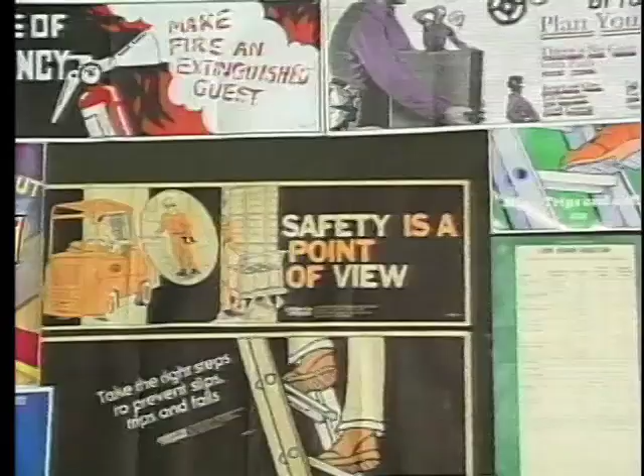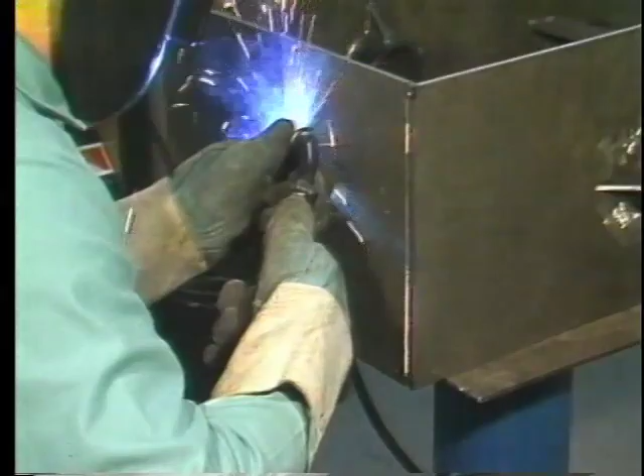Workers face daily exposure to potential hazards. Correct precautionary measures can prevent accidents and make welding as safe as any other metalworking occupation. Metalworking hazards include exposure to hot metal, sharp edges, and working around moving machinery. For welding, there are additional hazards such as electric shock, arc radiation, air contamination, flying objects, fire and explosions.

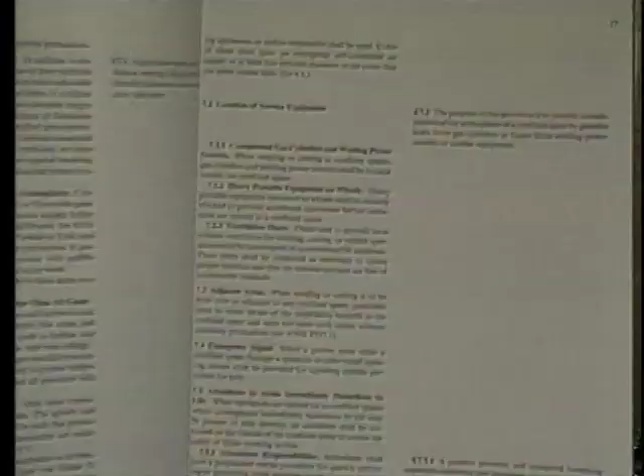To ensure safety for workers, there are laws which prescribe regulations and warnings. The Occupational Safety and Health Act makes many national standards enforceable by law. The most important is the American National Standards Institute Z49.1, Safety in Welding and Cutting. This standard states that welding and cutting operations pose potential hazards from fumes and gases, electric shock, heat radiation, and even excessive noise.

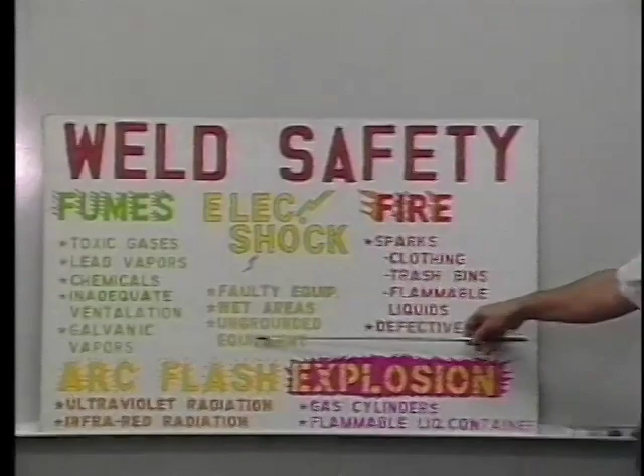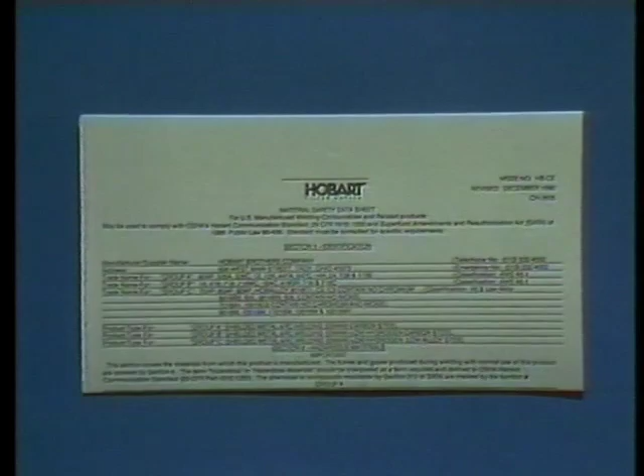Employers are required to establish comprehensive hazard communication programs to inform workers about dangers in the workplace. By the same token, the employee is obligated to learn and use safe practices, obey safety rules, and take proper care of equipment. The use of material safety data sheets, or MSDSs, is mandatory. These cover the potential hazards of every substance taken into the workplace.

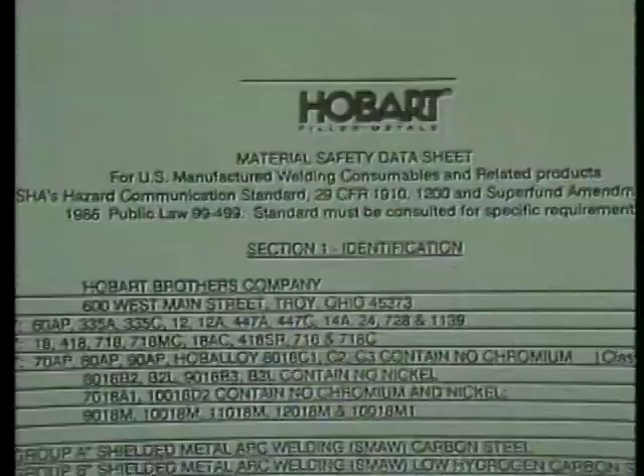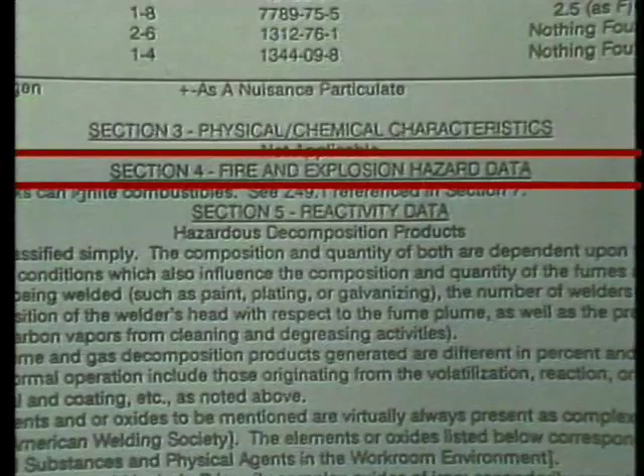Welding electrode suppliers furnish MSDSs, which should be kept on file in the personnel or welding department. Copies should be given to all supervisors, welders, and anyone connected with the welding area, and should be read and understood by all. An MSDS is divided into sections that identify the manufacturer and materials and list any hazardous filler metal ingredients, physical and chemical characteristics, potential fire and explosion hazards, emergency procedures, precautions and control measures, and reactivity data which explains what happens to the filler metal during welding.

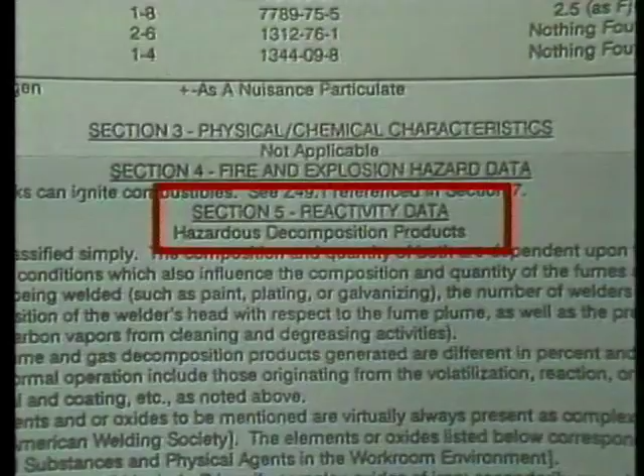The electric arc is a powerful source of visible, ultraviolet, and infrared light, all of which can be harmful unless suitable protection is used. Proper clothing should have no openings or gaps which expose the skin to ultraviolet arc burns. All personal clothing should be flame retardant, dry, and free of oils. Wool clothing is better than cotton because it doesn't disintegrate or catch fire.

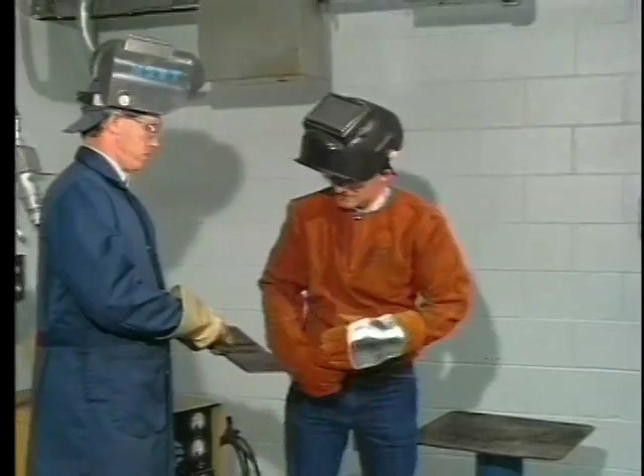For heavy-duty welding over 200 amps, a leather jacket or apron, leather gauntlet gloves, safety glasses, spats, head cap, and a helmet with a proper filter lens must be worn. Pants legs should be without cuffs and cover the shoes. The shoes themselves should be safety types with high ankles. Even with light-duty welding under 200 amps, the skin must not be exposed. Other personnel in the welding area should wear the same type of protective clothing.

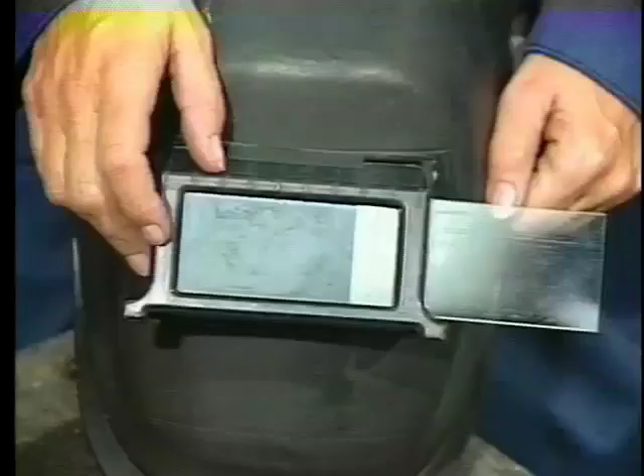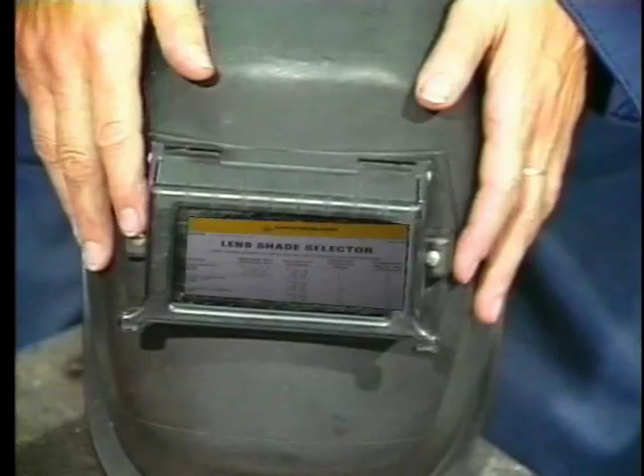Whatever the welding application, safety glasses should be worn at all times. Contact lenses may be worn for welding, but these do not replace safety glasses. Helmets should have the proper filter lens, protected from spatter by a clear cover plate. Lens shades use a numbering system to help select the amount of darkness required for the amount of amperage used. Refer to the American Welding Society's specification for safety in welding and cutting to determine the proper shade needed.

If unprotected eyes are exposed to the arc even briefly, ultraviolet arc burn can result, which causes the sensation of hot sand in the eyes for up to 48 hours after exposure. Up to 6 hours may pass before any symptoms appear. Eye drops or eye washes will give temporary relief. If the pain persists for more than 24 hours, a doctor should be consulted.

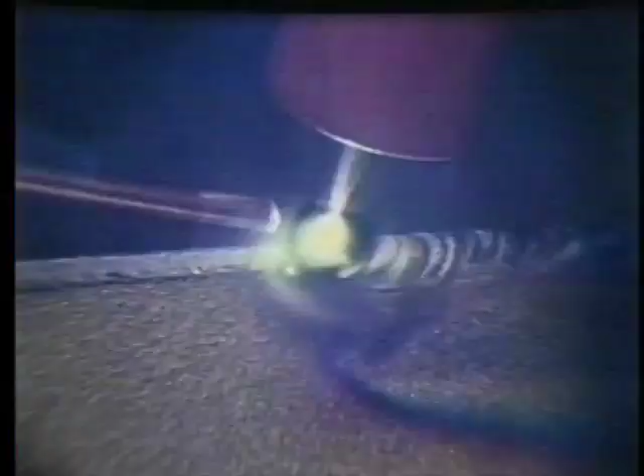Precaution signs should be posted in and around the welding area and should be in agreement with the American Standard specification for accident prevention signs. This includes warnings that anyone with a pacemaker should take special precautions or avoid arc welding areas. Heat from the arc is infrared radiation, which is harmless if the welder is properly protected. But ultraviolet radiation is invisible and much more potent.

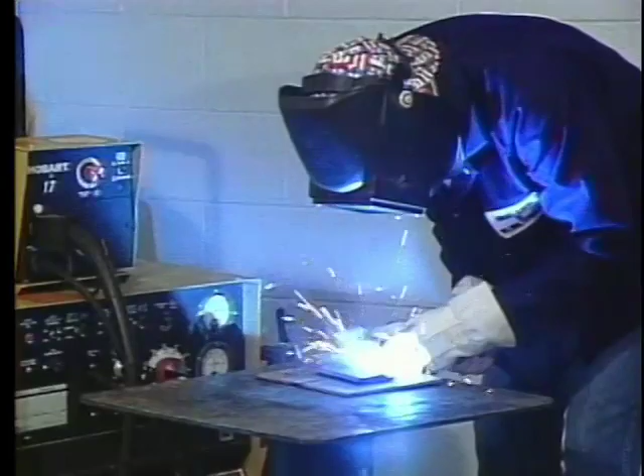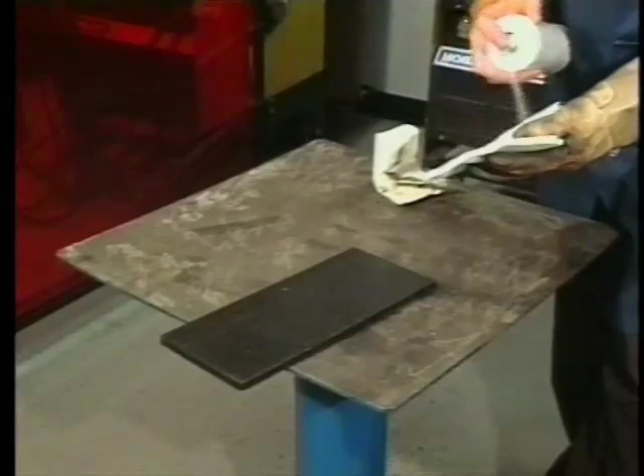Screens should be used around the welding area to shield nearby workers from the radiation and should be free from tears. If welding is done in an enclosed booth, it should be painted with a flat finish that will not reflect ultraviolet light. Metal degreasing or cleaning solvent operations should be kept at least 200 feet away from the welding area, since the ultraviolet radiation can decompose some cleaning chemicals into phosgene gas. This is a harmful substance with the odor of new-mown hay, and if detected, the area should be evacuated and ventilated until the gas has cleared. Because of this hazard, make sure solvents on metal are thoroughly removed before welding begins.

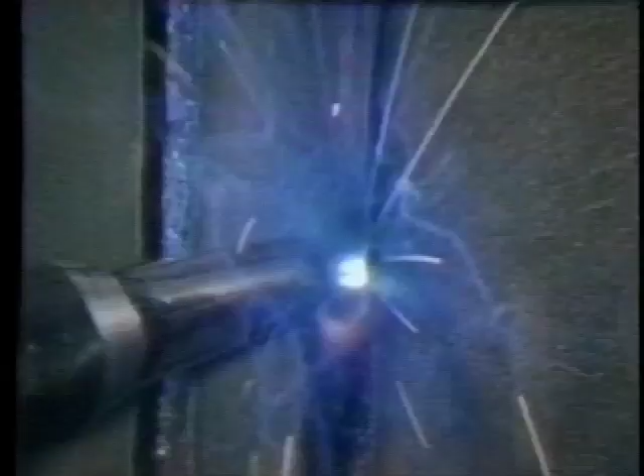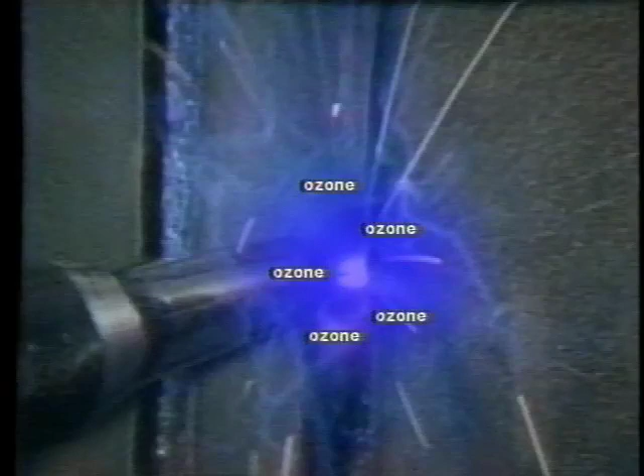Ultraviolet light can also produce ozone, an active and harmful form of oxygen that can cause coughing, wheezing, chest pains, or a burning sensation. Proper ventilation will reduce the ozone concentration around the arc area. It is not a long-range hazard since it changes back into oxygen a short distance from the arc.

Electric shock is associated with all electrical equipment or tools. Tools usually operate on ordinary 115-volt household voltage, but this is higher than the output of a conventional arc welding machine. National standards are set by NEMA, the National Electrical Manufacturers Association, or by the Canadian Standards Association. Use only welding machines that have one of these names on the nameplate.

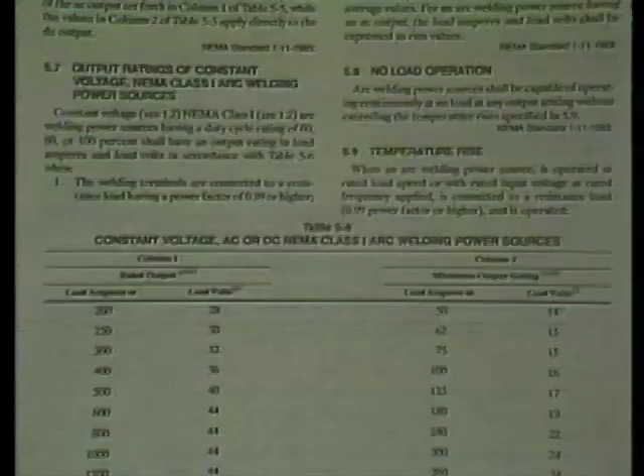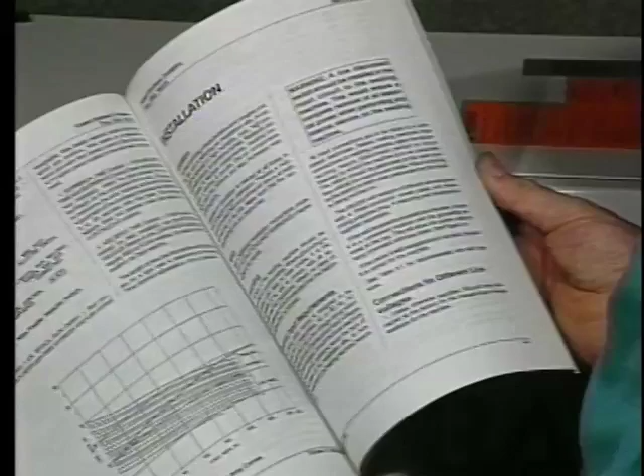NEMA specifications provide classes of weld machines and requirements for duty cycle and maximum no-load voltage. Machines must be installed in accordance with NEMA and local codes. Instructions are given in each manufacturer's manual.

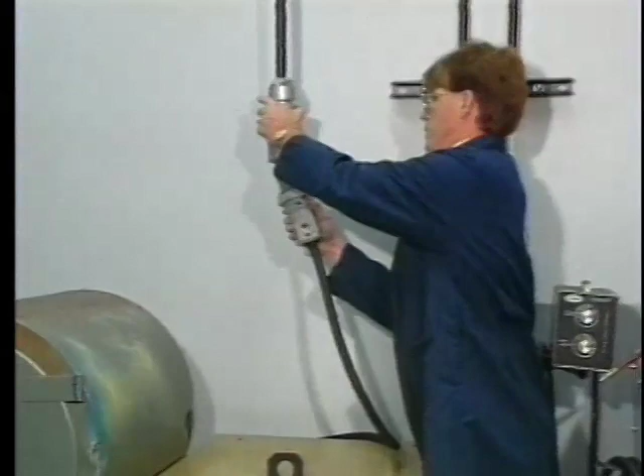If a grounding lead or conductor is part of the power supply cable, be sure it is connected to a properly grounded switch box or building ground. Use a separate grounding lead if it is not part of the supply cable. Note that this does not replace connecting the machine's ground lead to the work surface, which is essential for safe welding operation.

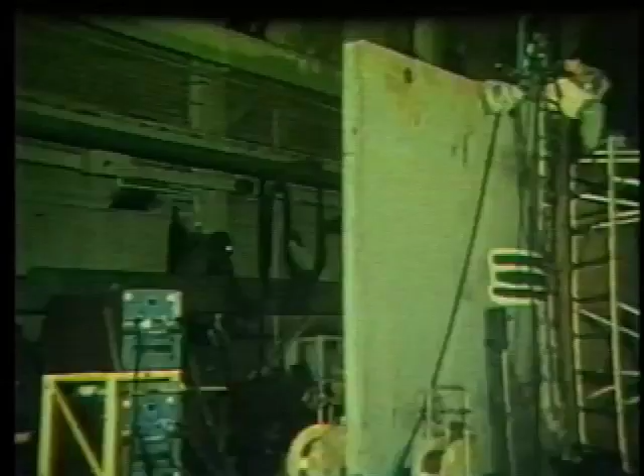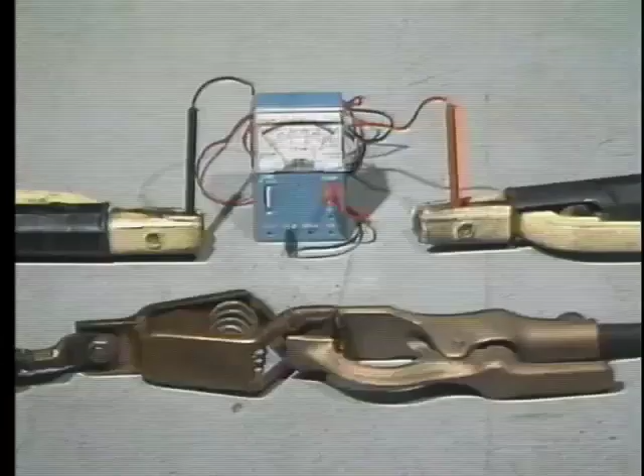When paralleling transformer machines, identify each phase of a three-phase power line. This assures that the machines will be in proper phase with each other. To check this, connect the work leads together, and then measure the voltage between the electrode holders, and it should be practically zero.

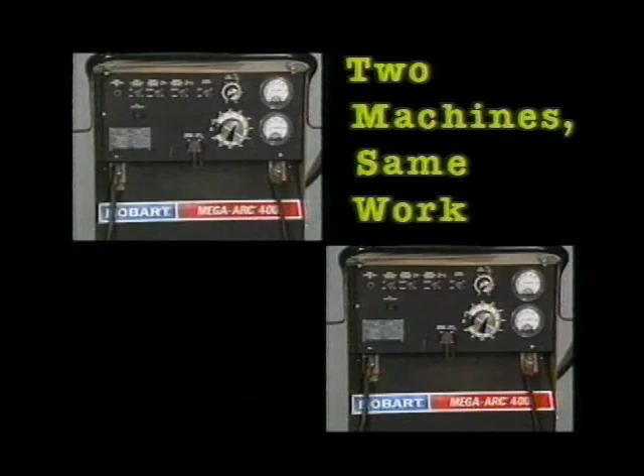If more than one direct current machine is connected to the same weldment, be sure that both are set to the same polarity, both positive or both negative. If they are not, the voltage between the electrode holders will double. Also, do not attach both AC and DC machines to the same weldment.

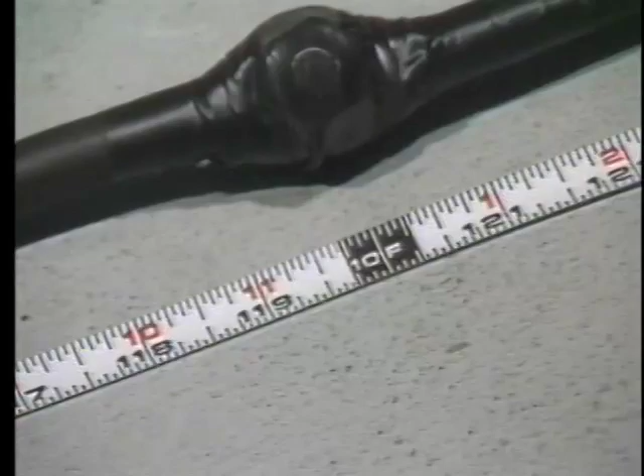Electrode holders should have flexible cables. No splices should be within 10 feet of the electrode holder or gun, and they should be well insulated. Welding machines should be located in a well-ventilated area with nothing obstructing the ventilation ports. Electrode and work leads should not be wrapped around the machine or the welder.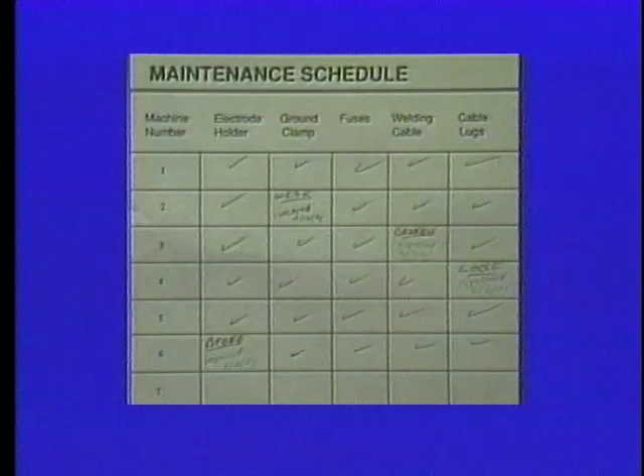Work areas must be kept dry. Dampness increases the chance of electrical shocks. A regular inspection and maintenance schedule should be maintained and records kept. No matter how small the problem, no one but properly trained maintenance personnel should attempt repairs on welding machines, cables, guns, work clamps, and electrode holders. All power sources should have disconnect switches for maintenance purposes. Notify your supervisor of any problems or potential hazards.

Air contamination is the smoke and fumes rising above the welding operation. These contain two types of contamination: particulate matter and gases. Adequate ventilation will reduce smoke hazards. Potential harm from fumes and gases depends on the chemical composition of particulate matter, the concentration at the welder's breathing zone, and the duration of exposure.

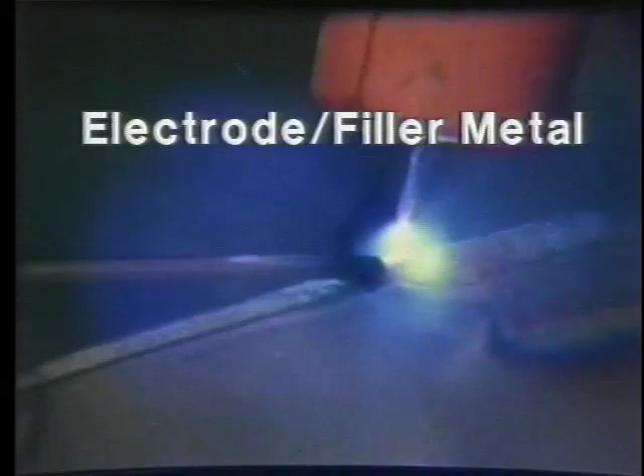Particulate matter is small, often invisible solids suspended in the air, such as tobacco smoke, household dust, and pollen. When welding, the kinds of particulate matter relate to the type of electrode or filler metal, the welding process itself, the current employed at the weld location, atmospheric conditions when welding outdoors, and the composition of base metals and coatings.

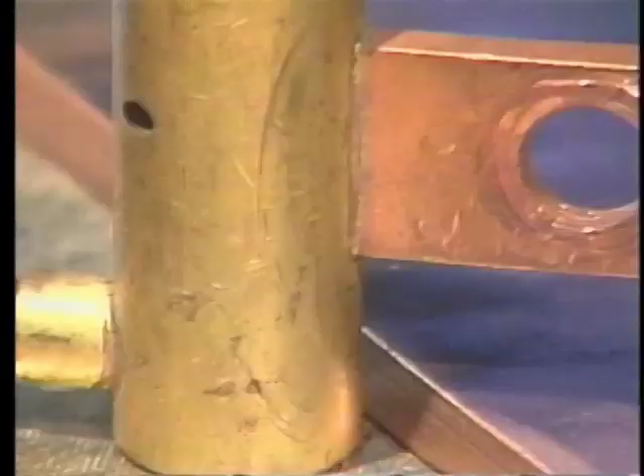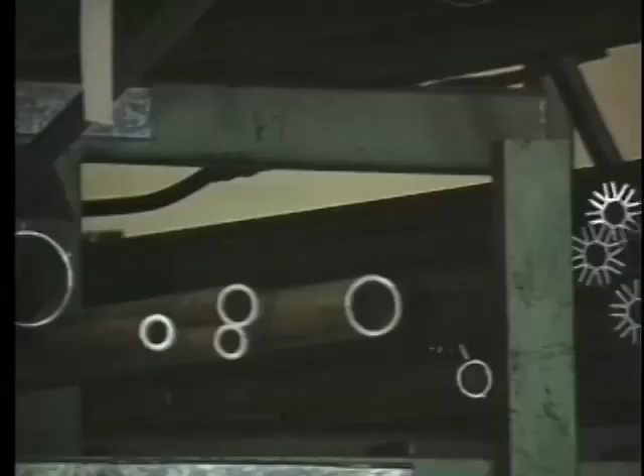Certain metals create hazardous airborne contaminants, such as brass, bronze, zinc, and others. Coatings on the metal, such as paint, oil, grease, or plastic, can also release contaminants. Welding on old painted steelwork can produce smoke containing particles of lead. Newer pipe is sometimes coated with a plastic protective material which can be harmful. Proper ventilation and parent metal cleaning and preparation will protect the welder from all such fumes.

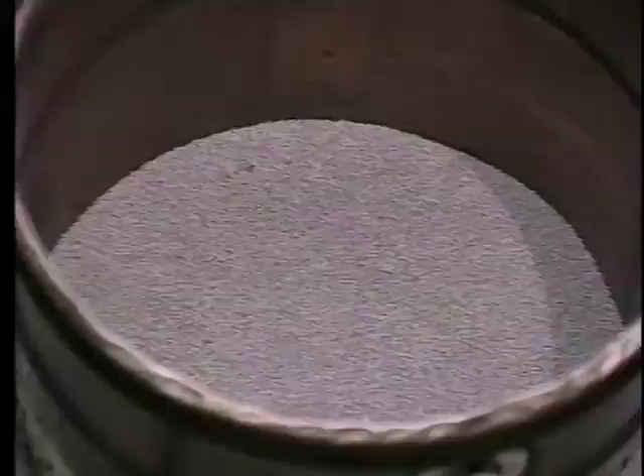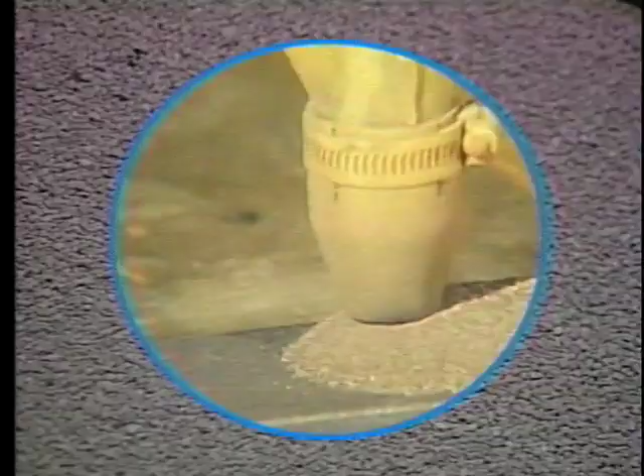An additional source of gases is flux, which is found in the coatings on shielded metal arc electrodes and inside the electrode wires used for flux cored arc welding. The flux used for submerged arc welding can also give off gases when heated. The most common gas produced by electrodes and filler wires is carbon dioxide. Carbon monoxide can also form. These gases should be removed from the welding area.

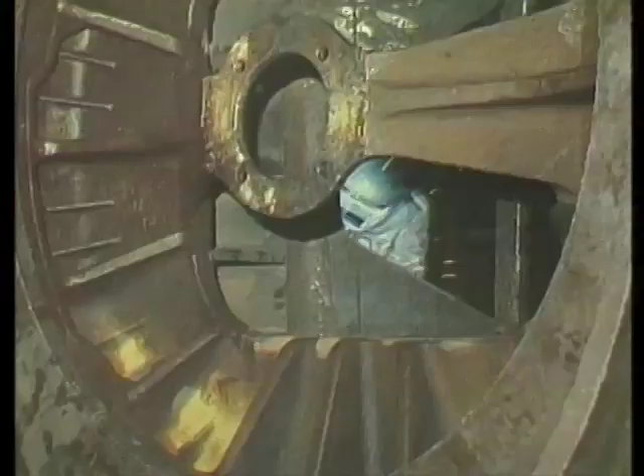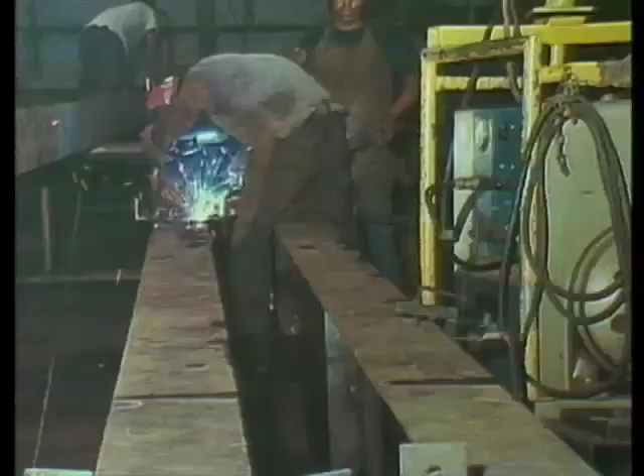Confined areas such as small and restricted spaces, tanks, pressure vessels, tunnels, or small rooms with poor ventilation can become death traps. The hazards here are poisonous, flammable, or explosive gases, oxygen depletion, or heavy concentrations of smoke and particulate matter. Exhausts from engine-driven machines are a prime source of carbon monoxide and carbon dioxide, even in less confined areas, and should always be channeled outside. Refer to American National Standards Institute Z117.1, Standard for Welding in Confined Spaces.

When welding in confined areas, lookouts should be assigned to watch the welders and other workers in the area. Voice contact should be maintained throughout the welding operation. In extremely confined areas like tanks or vats, welders should wear lifelines, harnesses, or both, so they can be pulled out if they are overcome. The atmosphere in enclosed areas should be checked before welding is attempted. An explosimeter can be used to test for explosive concentrations of gases and adequate levels of oxygen.

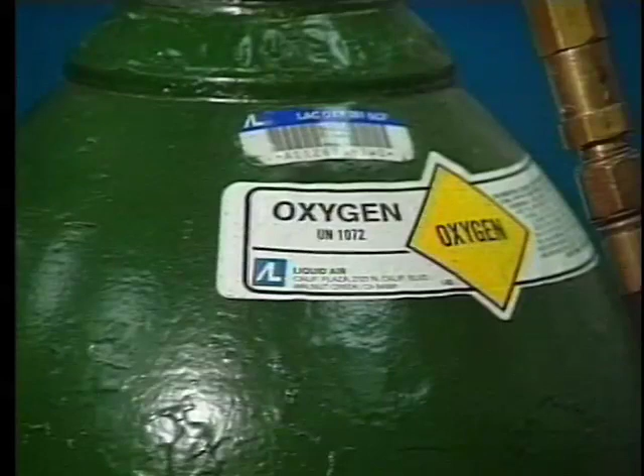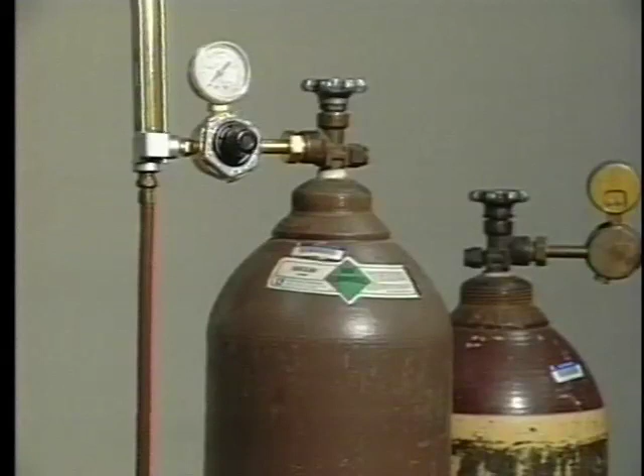Oxygen should not be used in place of compressed air to ventilate enclosed compartments. If the oxygen content of the air is even 5% more than normal, the area could become combustible when an arc is struck. On the other hand, if heavier than air shielding gases such as argon and carbon dioxide are used in confined spaces, the oxygen content will drop, perhaps below breathable levels. Such areas should be monitored to assure proper oxygen levels.

To ventilate these areas, air exhaust and fresh air supply systems should be used. If this is impractical, a respirator or self-contained breathing apparatus can be used. Respirators can be selected and fitted by trained personnel following OSHA standards.

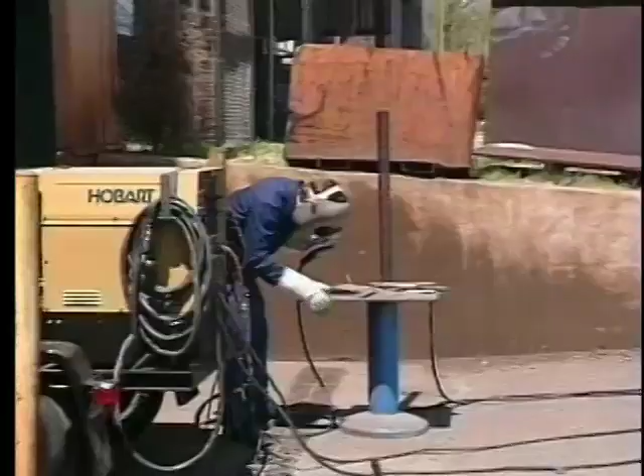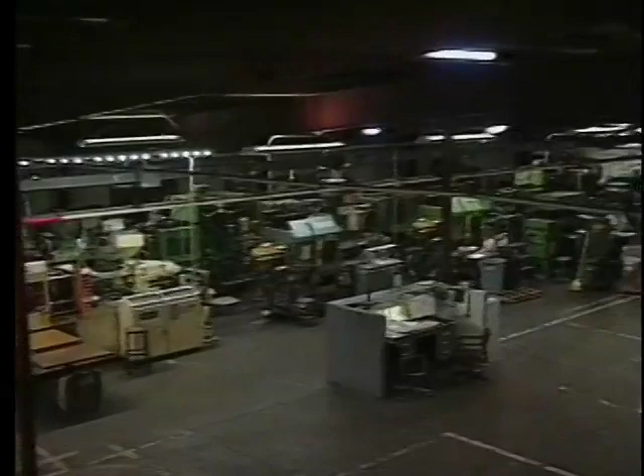There are 3 types of ventilation. Natural ventilation is welding outdoors or indoors in an area that provides 10,000 cubic feet per welder with a ceiling of 16 feet and with no partitions, balconies, or other structural barriers. When hazardous materials are welded, natural ventilation must be supplemented.

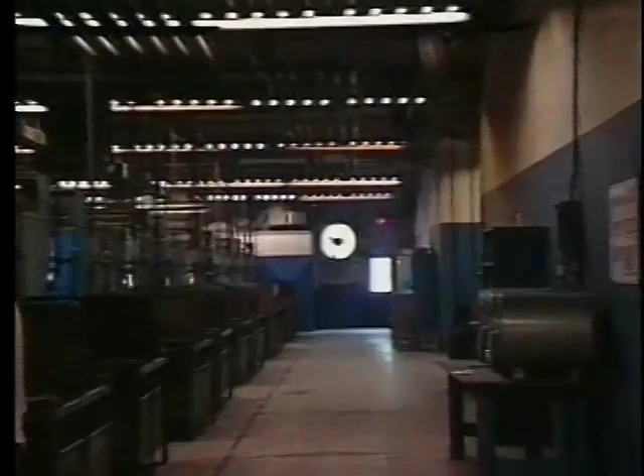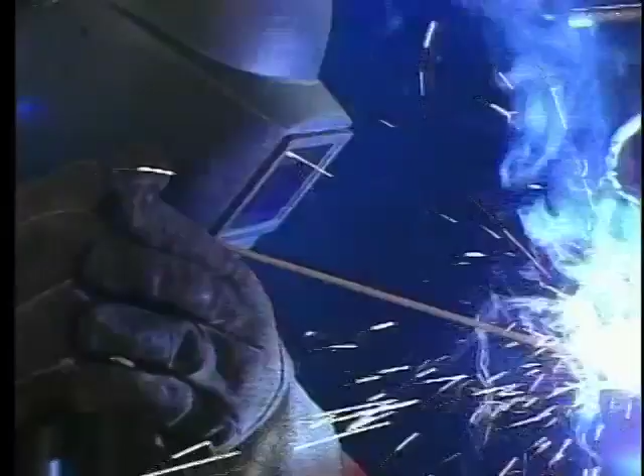General mechanical systems use roof exhausts, wall fans, or other large air movers in order to keep airborne contaminants low and prevent explosive gas mixtures from accumulating. Such systems can also be used in individual welding booths. Local exhaust systems have a fixed or movable hood placed near the work area or even in the welding gun. Movable hoods can be adjusted as desired to pull smoke and fumes away from the welder. To check if the area is properly ventilated, samples can be collected and analyzed from the breathing zone under the welder's helmet.

Many industrial fires are caused by cutting and welding in areas that are not specified or approved for such work. The 3 elements of the fire triangle, heat, fuel, and oxygen, are present in most welding operations. The heat from the arc, torch, or hot metal, the fuel from gases or combustibles in the area, and oxygen in the surrounding air. Sparks can fly up to 35 feet or more and fall through any cracks or openings

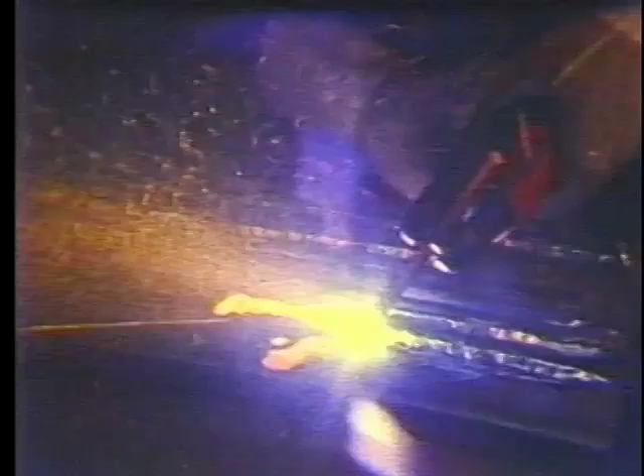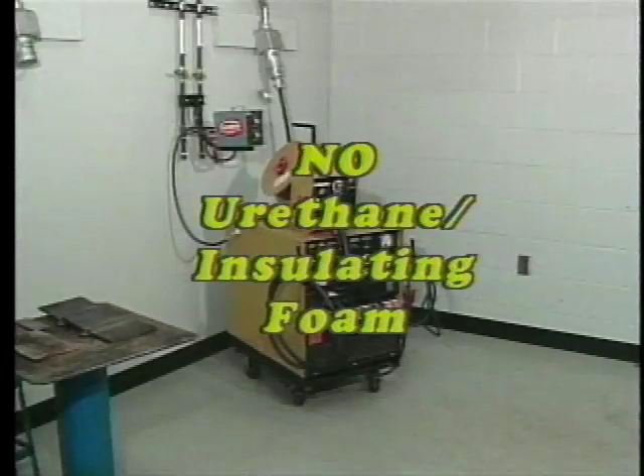in partitions and floors. All combustibles or flammable materials should be removed from the welding area. The area itself must be constructed of non-combustible materials. No urethane foam or other insulating organic foam should be part of the area. Gas lines should be installed in accordance with codes and specifications. Fuel gas cylinders should be stored in specified, well-ventilated areas or outside away from oxygen. They should be stored vertically, with valves closed and caps on, whether empty or full.

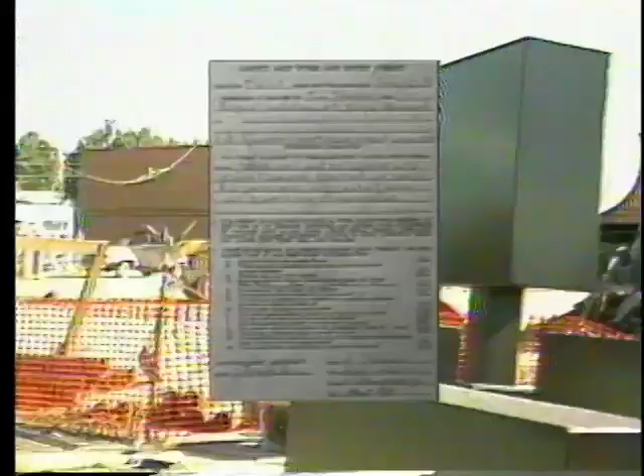Hot work or welding permits are required whenever welding or cutting is done on hazardous materials or anything that once contained such materials, or for areas not designated for welding. These are signed and dated by those involved. Hot work permits are especially needed for maintenance welding, such as with construction equipment in the field, aircraft, ships, or other potentially hazardous areas. Have a fire extinguisher within easy reach, and when the danger is great, have an extinguisher operator standing by. Containers must be given special attention.

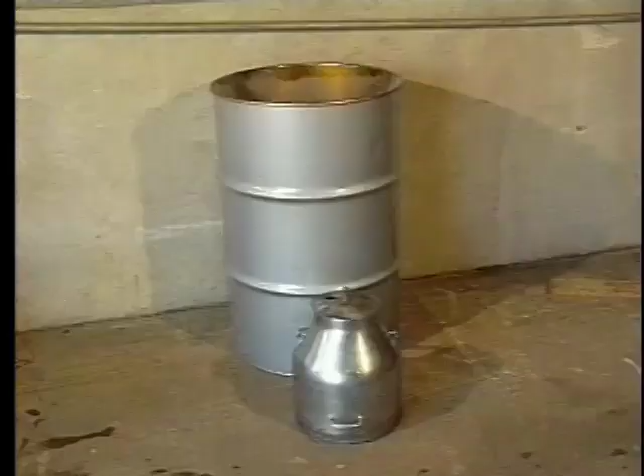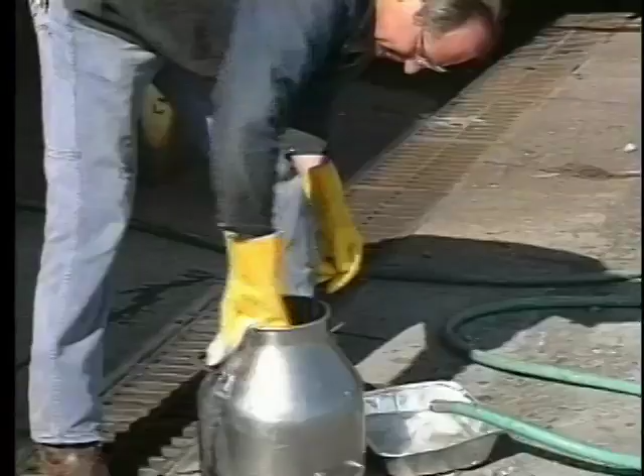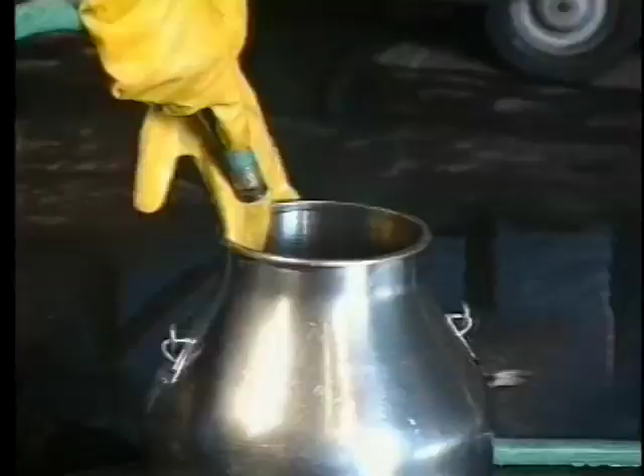Vent any confined air before welding. Then, empty containers must be prepared properly to eliminate dangerous chemicals or their residues. Cleaning containers is preferably done outdoors. If it must be done indoors, assure that the area is well ventilated. Drain all materials and match the cleaning method to the type of material. For water solubles, clean with water. Otherwise, use a hot chemical solution or steam. Cold water methods are less effective.

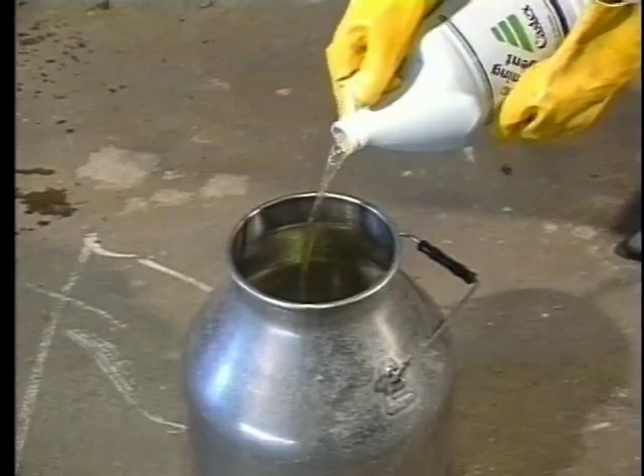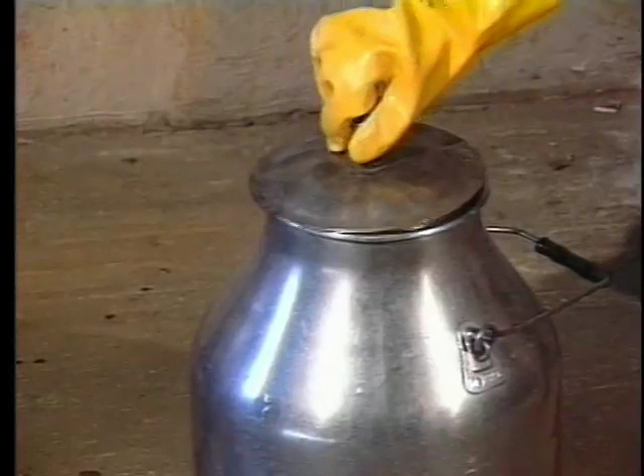The container can also be filled up to 25% with cleaning solution, then cleaned thoroughly. Afterwards, low-pressure steam is injected and permitted to vent for several hours. Afterward, inspect the tank to make sure it is thoroughly clean, then close any openings. Let it sit for 15 minutes, then test a further sample of the air inside. When the tank is determined to be safe, it should be so marked and dated.

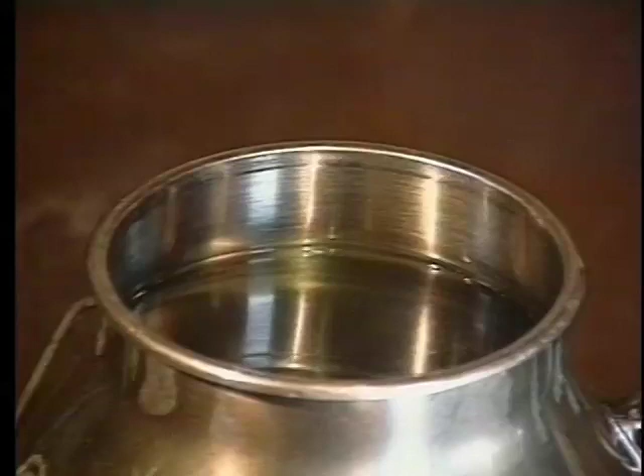As an additional precaution, the container can be filled with water up to within a few inches of the weld area and vent the space above the water so air can escape. The container can also be filled with an inert gas, one that is not flammable or reactive.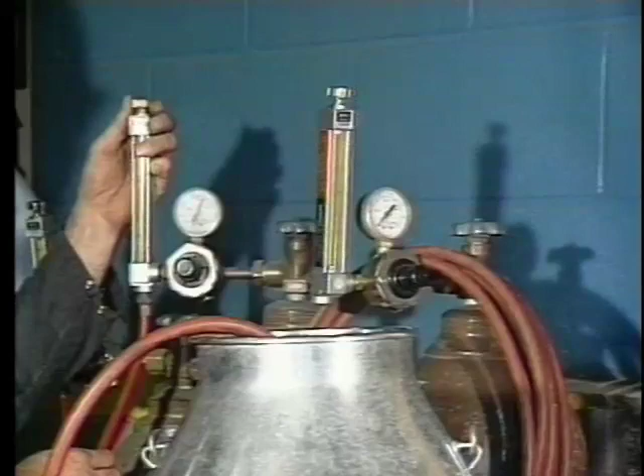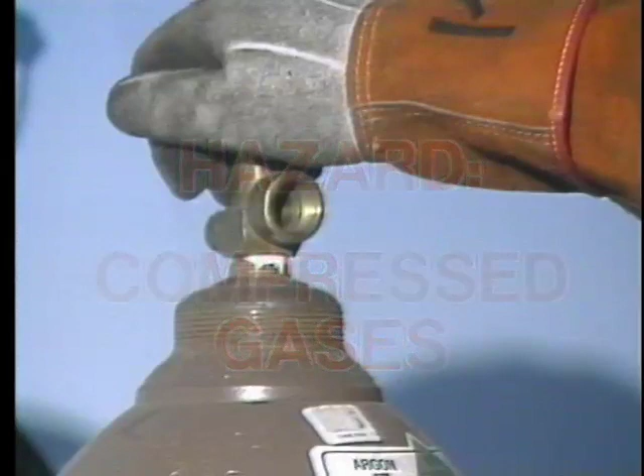Compressed gas cylinders are always potential dangers. If the valve is suddenly broken, the pressurized gas can turn the cylinder into a rocket. The United States Department of Transportation and the Canadian Board of Transport Commissioners set regulations governing gas cylinders. Some of the most important are: the contents should be legibly marked by chemical or trade name using decals or labels. Cylinders should be condemned and never reused when they develop leaks, internal or external corrosion, dents, bulges, or any evidence of rough use that may have weakened the cylinder.

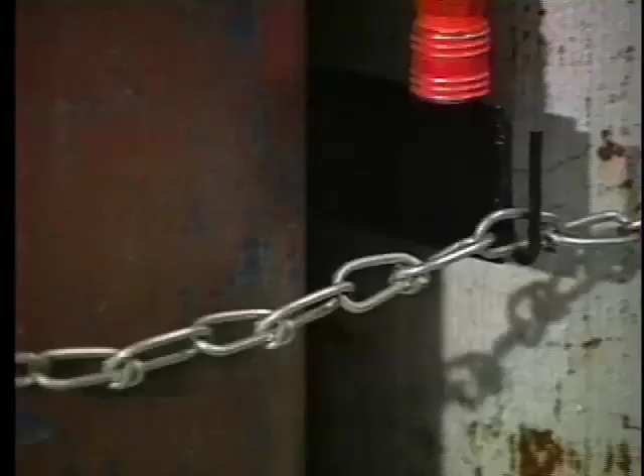They should be stored in cool, well-ventilated areas where the temperature never exceeds 130 degrees Fahrenheit. As mentioned earlier, they must be stored upright with valves closed and protective caps in place. They should also be clearly marked when empty. Cylinders should be secured by chains or clamps, whether in storage or in use. Small portable cylinders should be mounted securely on specially designed trucks.

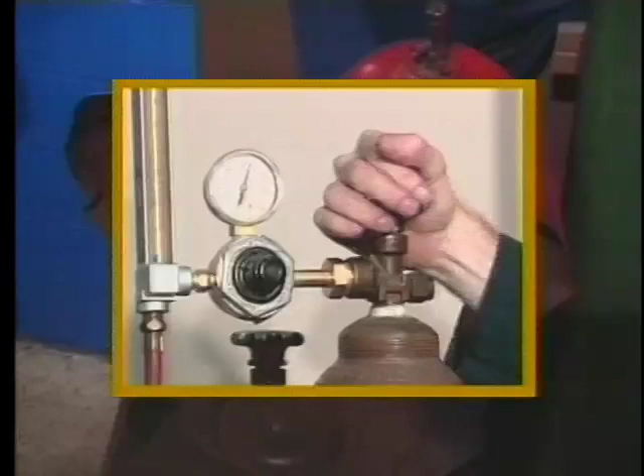Because the contents are under extremely high pressure, cylinders should not be dropped, struck, or rolled around. Use hand wheels to open the valve, not wrenches. Avoid strong magnetic fields, especially magnetic cranes, and make sure they are nowhere near the electric arc and its circuit.

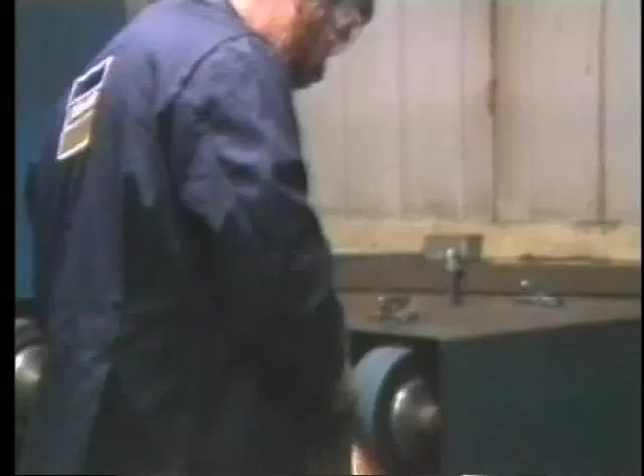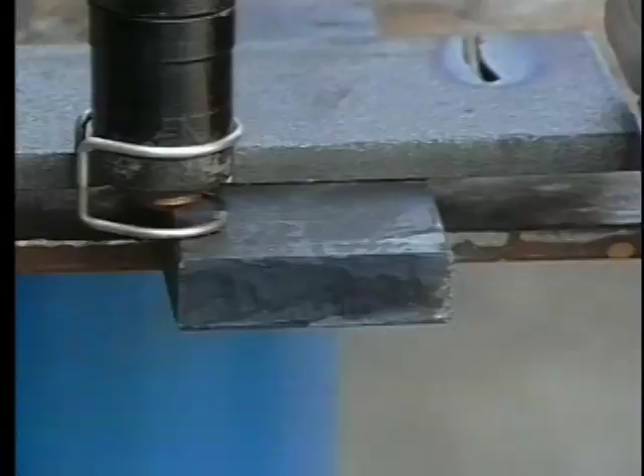When slag is chipped or ground from a weld, it can fly with surprising force. Particles and dust are common in welding areas, so wear safety glasses with side shields. Welders may be required to work in radioactive areas. Qualified personnel should make the decision as to how welding should be performed in such areas. Excessive noise levels can cause hearing loss. Peening, chipping, air carbon arc gouging, or plasma cutting can create enough noise to cause temporary or permanent damage. If you're not sure about the noise level in your specific area, measuring devices are available and should be used.

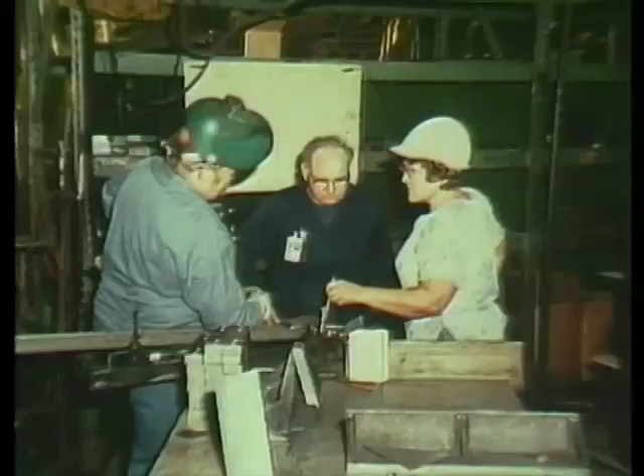In some plants, hard hats should be worn to protect against falling articles. Keep the work area clean. Electrode stubs should be placed in containers and not just dropped on the floor where they can be tripped over. If a question or problem arises where you work, consult the safety director. Remember, personal injury can be sharply reduced or practically eliminated by being aware, being informed, and just using common sense.